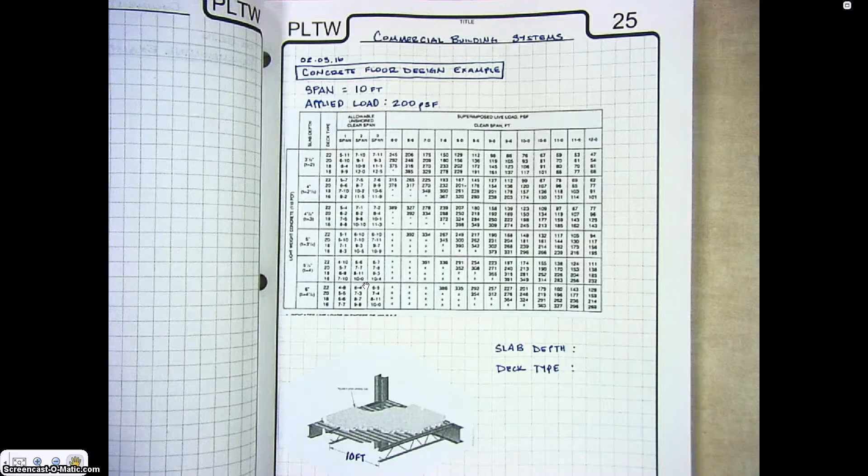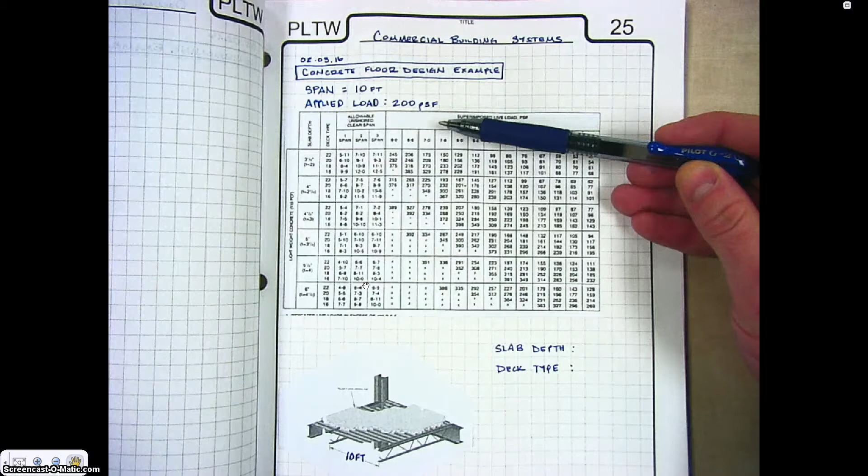Here are our design constraints. We have a span of 10 feet and we have an applied load of 200 pounds per square foot. This number can be found in the code books depending on the use of the facility and the area and size of the space.

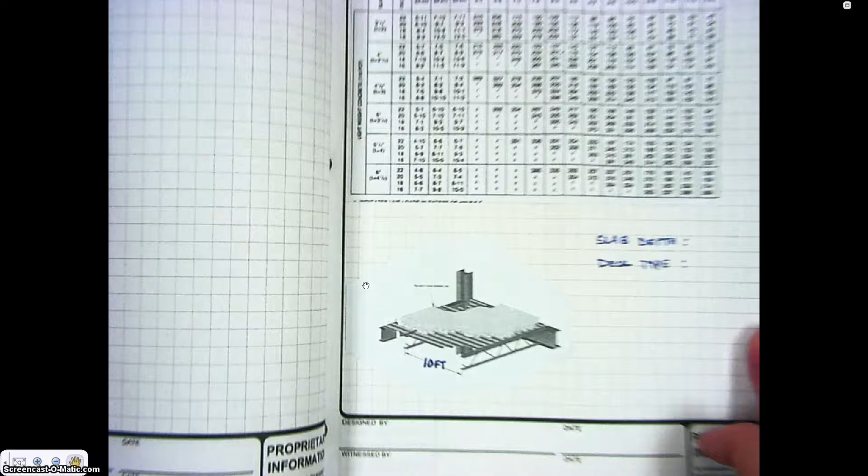Let's zoom in here on our diagram so you can see what I'm talking about. What we have here is a second level of a commercial building. We have a poured concrete floor that's going to go in the building.

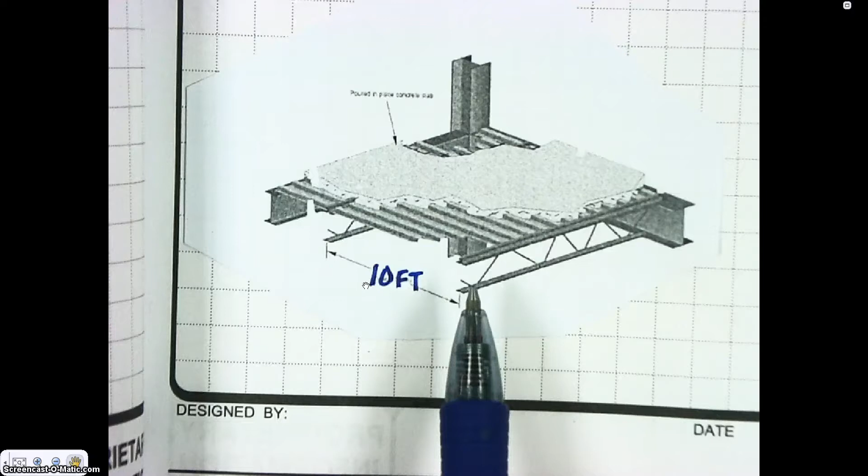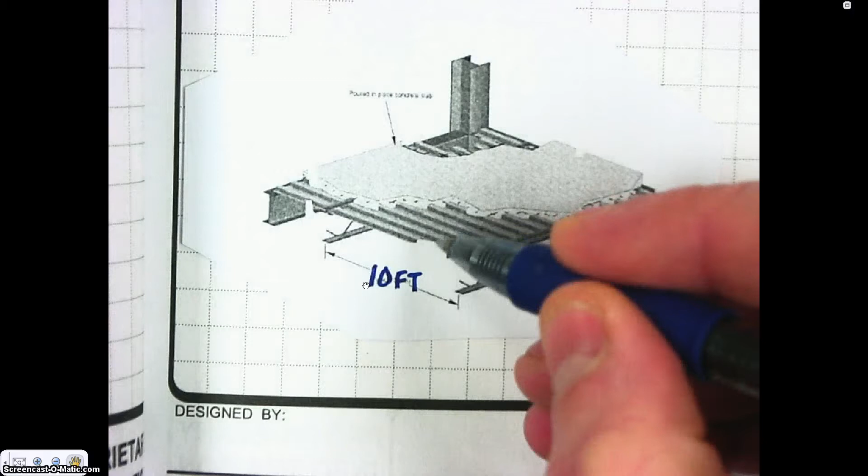Between these trusses, this span is 10 feet in our design. The table's going to tell us how thick do we want this concrete to be, and what gauge of metal webbing should be underneath the concrete that's supporting it. Let's look up here at our table, we'll explain this really quickly.

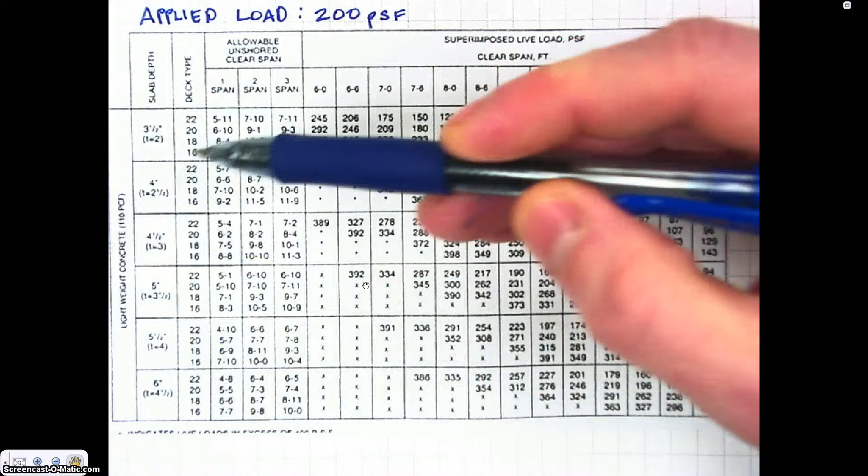Here we have the slab depth, or how thick the slab is. We'll talk about the unshored clear span in a minute, I'll come back to that. Here we have our clear span in the number of feet. We're trying to design the most efficient use of materials, and in our case we have a 10-foot span.

So I will find the 10-foot right here. And we have a design load of 200 pounds per square foot. So I'll come down until I find a number that is greater than 200 pounds per square foot.

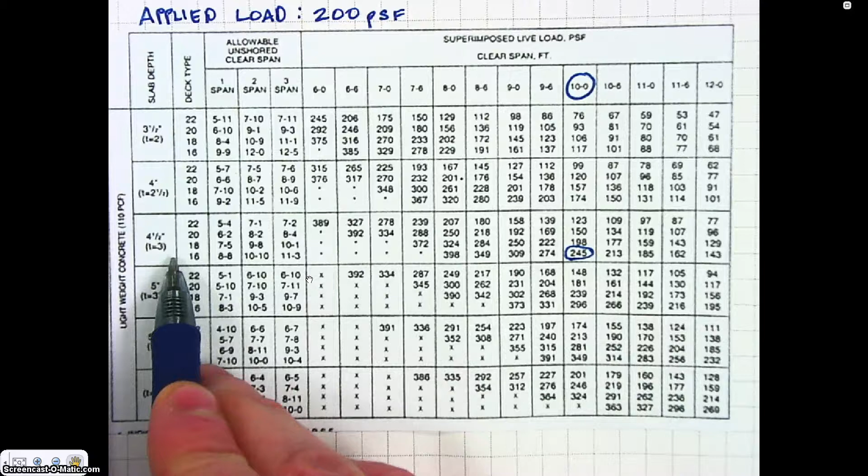Excuse me, I said that incorrectly. We need to find a number that will support more than 200 pounds per square foot, but we want to do it as efficiently as possible. In this case, 198 is not enough support, so we have to go to the next number, which is 245. So if we want to have a span of 10 feet with 200 pounds per square foot of applied force, we would use this table to figure out the concrete we need. It's telling us that our slab depth for that span is 4.5 inches.

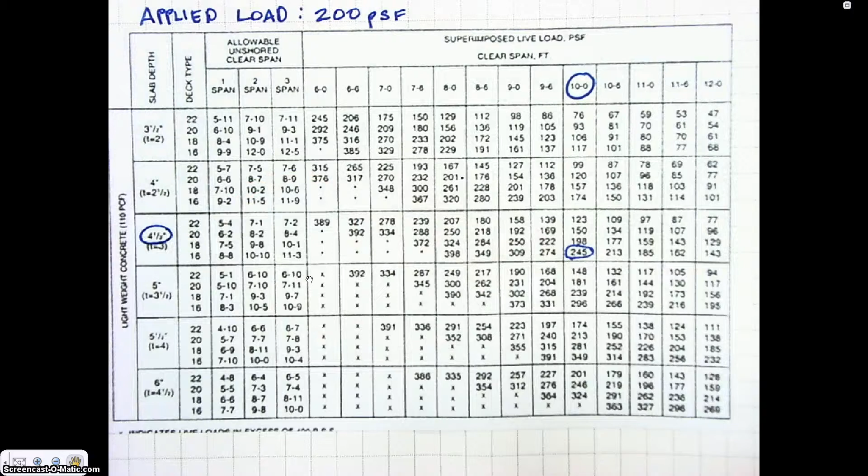So that's right here. I'll write down here where I have slab depth, I will type in or write in 4.5 inches.

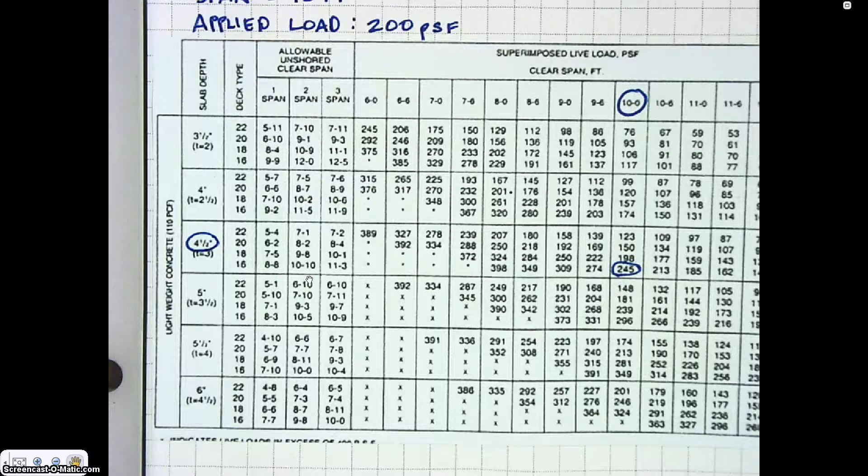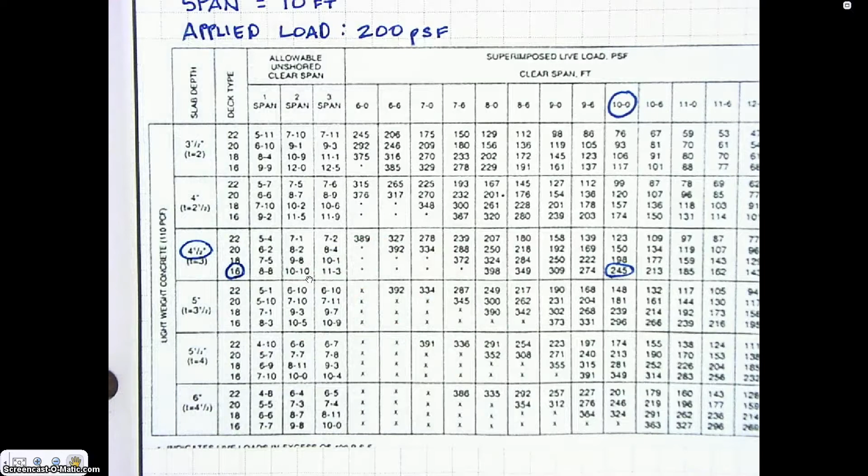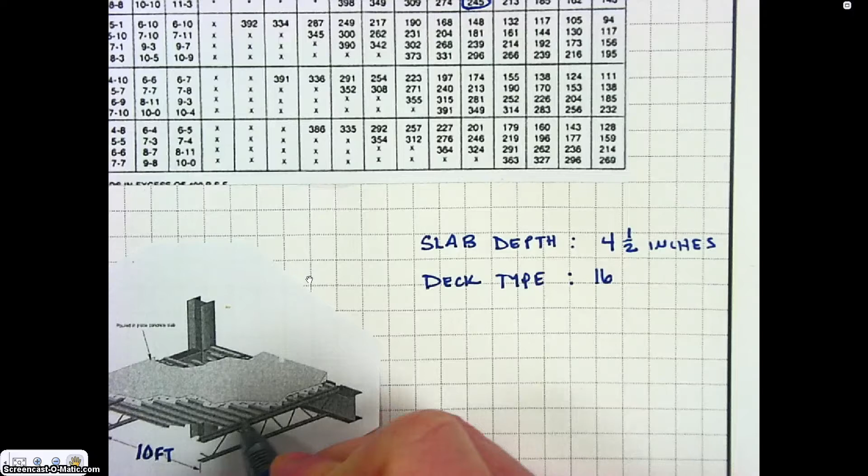Then we can come over here and look at the deck type that it recommends. If I go across with my table, the deck type is right here. It's recommending that we use 16 gauge steel for our deck type right here. So I'll write that: 16 gauge.

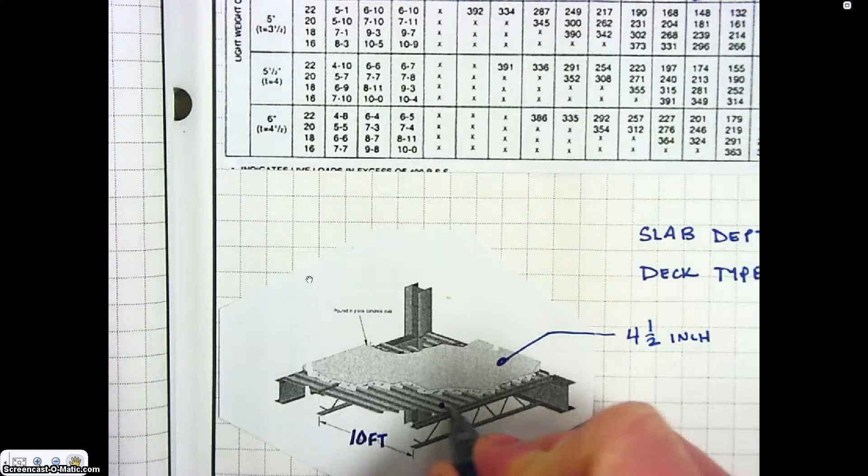And I'm going to go ahead and annotate that on our diagram down here. So this is going to be 4.5 inch, and our deck type is going to be 16 gauge.

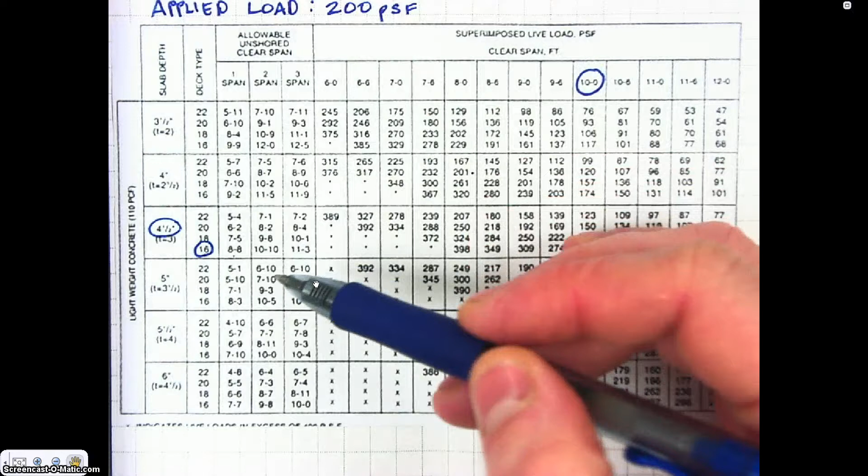The last thing that we need to look at is the allowable unshored clear span. That's this column right here. If we look at this chart, this column, we can see that we have three numbers here: a number for one span, a number for two spans, and a number for three spans.

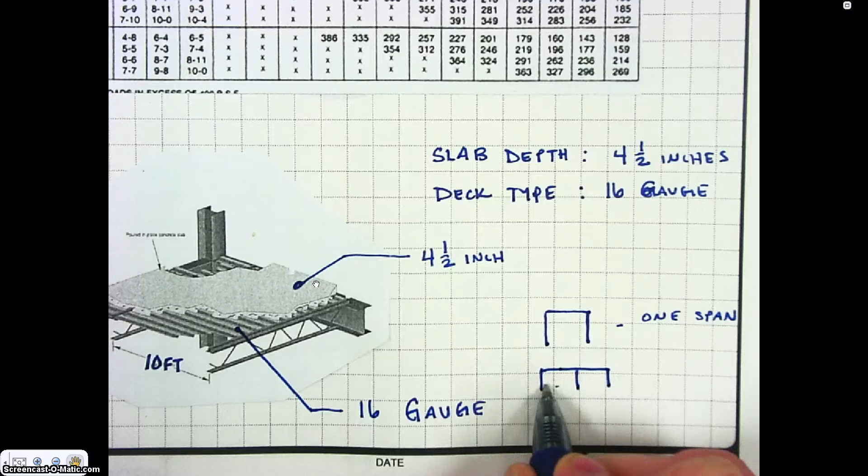So if I come down here, we'll make another little sketch. This is an example of one span. Two spans would be like this, so we're spanning two spaces. This again is our concrete decking and floor, and here are the number of spans we're making. And the last one, this would be a three span.

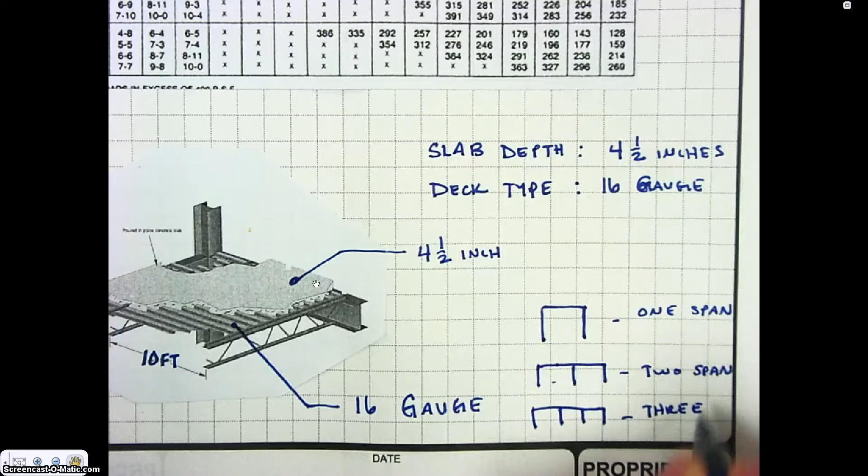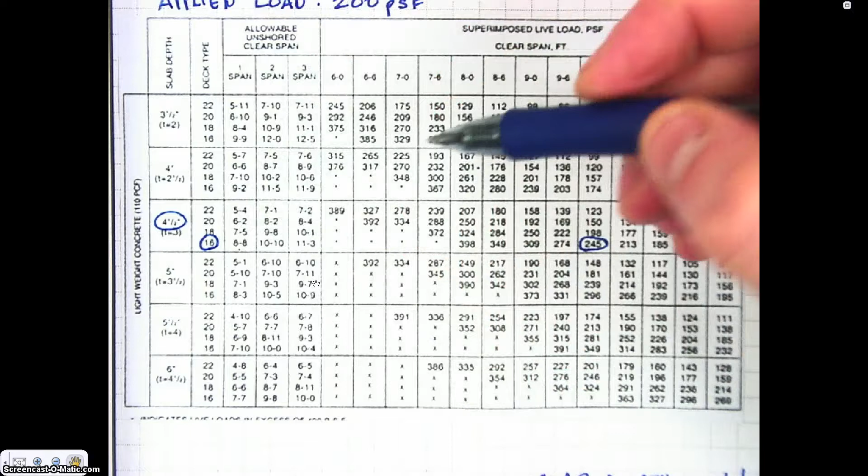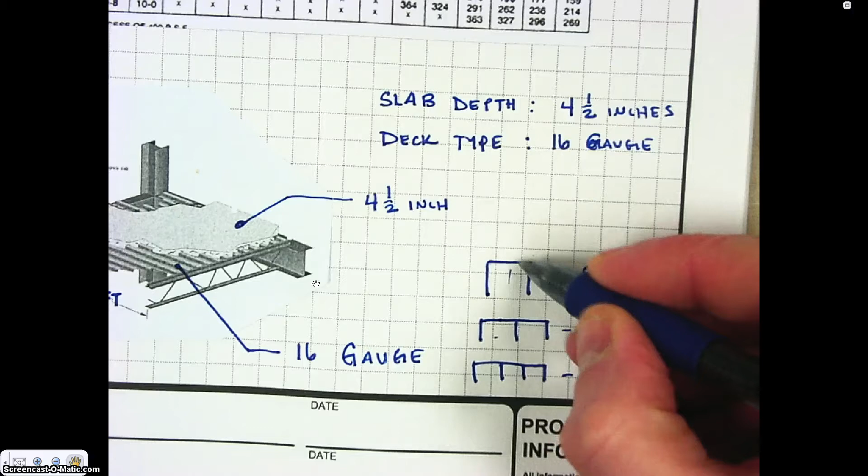If we come back up here and look at our chart, it says allowable unshored clear span. What that means is that if we shore up something, we are going to put extra support between them. So if I wanted to shore this span up, I would put something else right here to help hold it up while the concrete cured or dried.

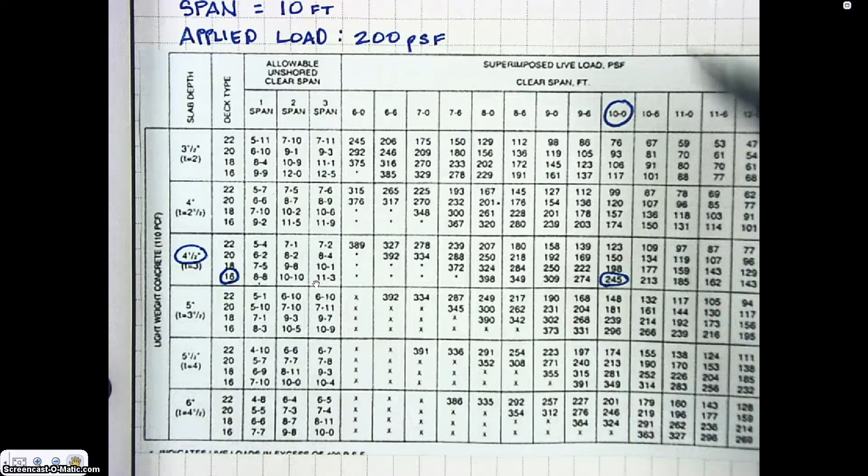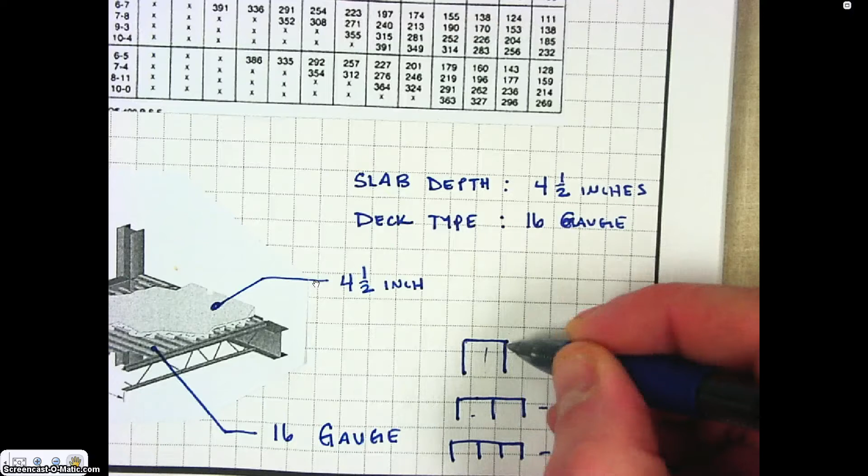It's telling us here on our chart that if we have one span, we can only span 8 feet 8 inches, which is less than our 10-foot required. So if we're spanning just one 10-foot gap, we have to have some type of support underneath that to hold that concrete and the decking material up until it is completely cured.

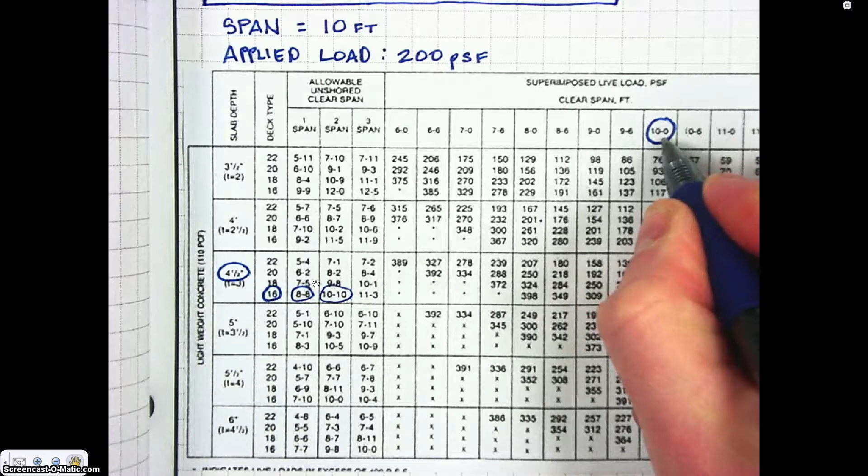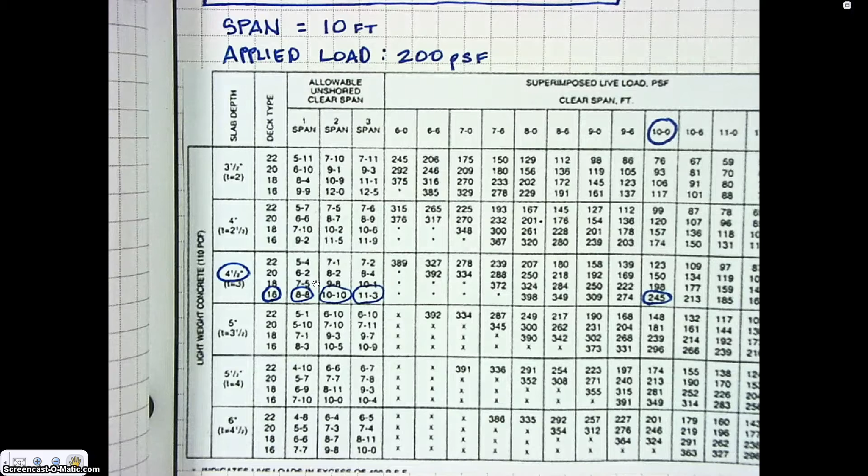In this case, if we had one span, we would need it. If we had two spans, that's greater than our 10 feet, so we don't need it. Obviously, if we have three spans, we still don't need it. So if we were just having a building that was 10 feet and we only spanned that 10 feet, we would need to shore the middle of that span up with some other temporary support until the concrete cured.